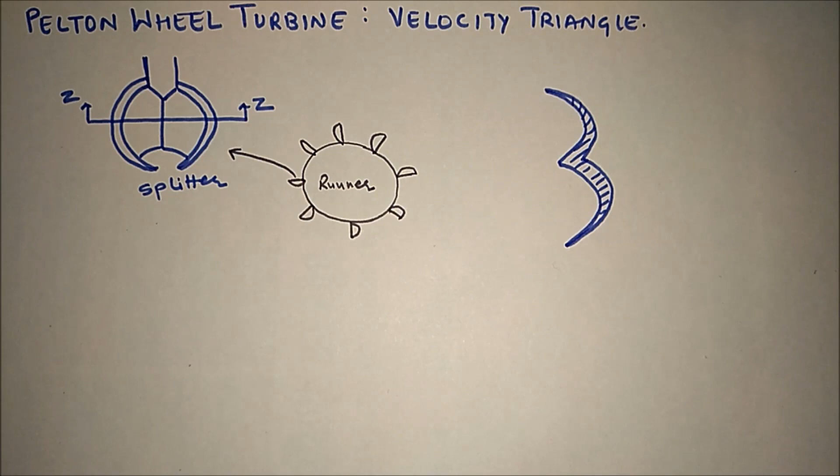This is the second part of Pelton wheel turbine. In our first part, we have discussed the construction and working of this turbine, and in this video we are going to discuss the velocity triangle for this Pelton wheel turbine.

So in our previous video, I have shown you the runner, the working and construction. In construction we have seen this is a runner, and in the periphery of the runner the buckets are attached, that is blades, or you can say vanes are attached. The vane is the shape of two hemispherical bowls like this. So when you see the blade it will look like this.

This is a splitter. What is the function of a splitter? The splitter divides the jet of water into two equal parts, to go here and here, both the buckets. Now when you cut a cross section here, you will see the bucket somewhat like this. In the previous part I have also told you that the jet of water hits the splitter.

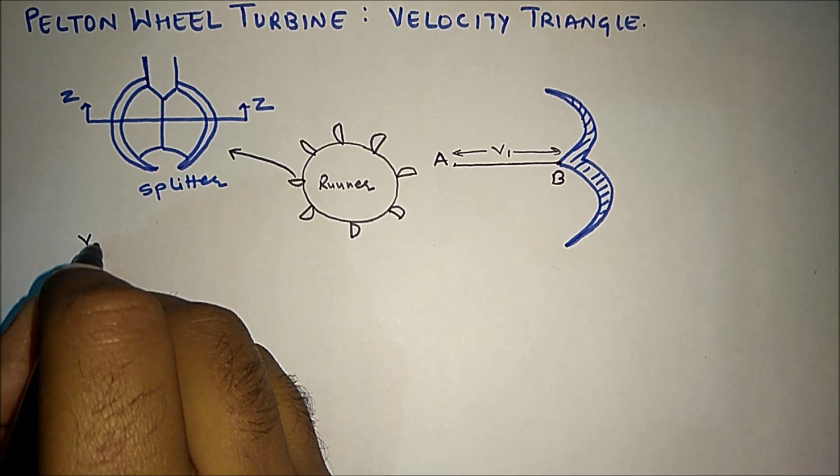Means water enters in the bucket like this. So let this be A, this be B. So this is the velocity, that is v1. Because we are drawing the inlet triangle, I have used v1. So what is this v1? This is the absolute velocity of jet. This is v1.

Now as the vane or blade is also moving with a velocity u1, this is velocity of blade, or you can say vane or bucket, whatever you say. So there is a velocity of blade also. Now both are moving in the same direction. Blade is also moving in this direction, jet of water is also moving in this direction.

So the relative velocity of both will be the difference, that is relative velocity vr1 will be equal to v1 minus u1, because v1 and u1 both are in the same direction. So let this point be C. This will be the relative velocity vr1.

Now we know that the absolute velocity has two components. One is horizontal and one is vertical. Horizontal component is vw, that is whirl velocity, and vertical component is flow velocity. If this is absolute velocity, it has two components, horizontal and vertical. So in this case, v1 is horizontal, so the vertical component will be 0. Means in this case, vf is 0. Means the value of v will be equal to vw1, because this is horizontal. So this will be equal to vw1.

And in this case, this angle is alpha, and alpha angle is 0. What is the angle alpha? Alpha is defined as the angle between absolute velocity and the direction of velocity of blade in the inlet triangle. So here vf and alpha are 0. So v1 will be equal to vw1. And what is vw1? Vw1 is whirl velocity at inlet.

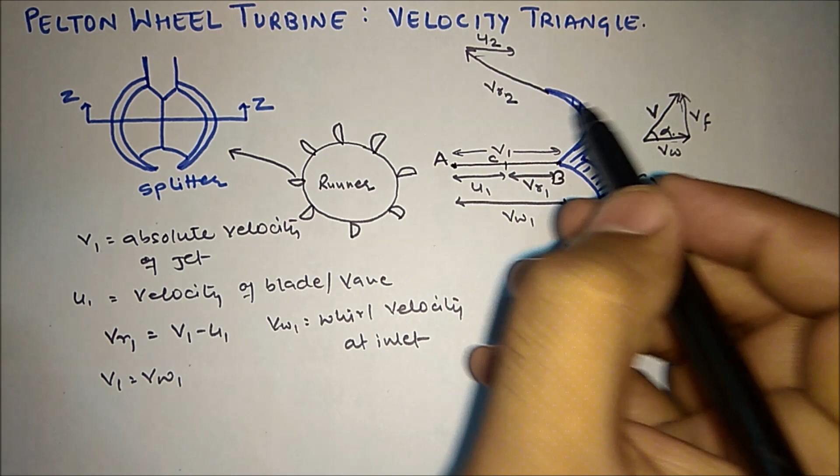So this is the inlet triangle, and when you see the outlet triangle, the water enters with vr1 velocity, so it will exit with vr2 velocity. And there is also a blade velocity of u2. In the outlet triangle I have used u2, and here we have used u1. When you join this line, this will be v2, the absolute velocity at outlet.

So absolute velocity of jet v1 and v2: v1 is for inlet and v2 is for outlet. Similarly u1 and u2, velocity of blade or vane for inlet and for outlet. Now here again v2 has two components. One is the vertical component, the other one is the horizontal component, that is vw2, and this will be vf2.

Now vf2, this is flow velocity at outlet, because at inlet it is 0. vf1 is 0. Now I hope you all know all the variables. Absolute velocity, velocity of blade, relative velocity, whirl velocity, and this is flow velocity. 2 is the subscript used for outlet and 1 is the subscript used for inlet.

Now we have to define 4 angles, that is alpha, beta, theta and phi. Now these are the angles for absolute velocity, and these are the angles for relative velocity.

Okay, alpha is for inlet, beta is for outlet, theta is for inlet, and phi is for outlet. Okay, so alpha and beta are the angles made by absolute velocity with u, that is the direction of blade, and theta and phi are the angles made by relative velocity with u. Okay, so phi is the angle of relative velocity with u for outlet.

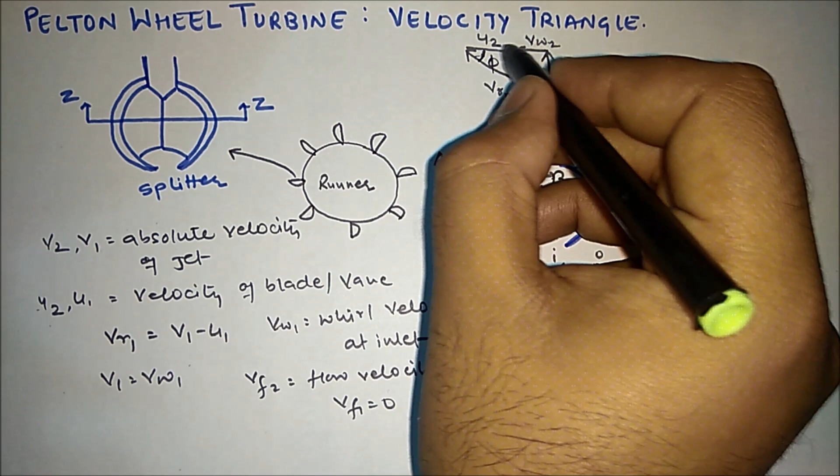So relative velocity is Vr2 and u is this, so this angle is what? Phi. And for absolute velocity with u, for outlet it is beta. So this is absolute velocity and u direction is this one, so this angle is beta. Okay, and for inlet both the angles are 0. That means for inlet triangle, alpha and theta both are equal to 0.

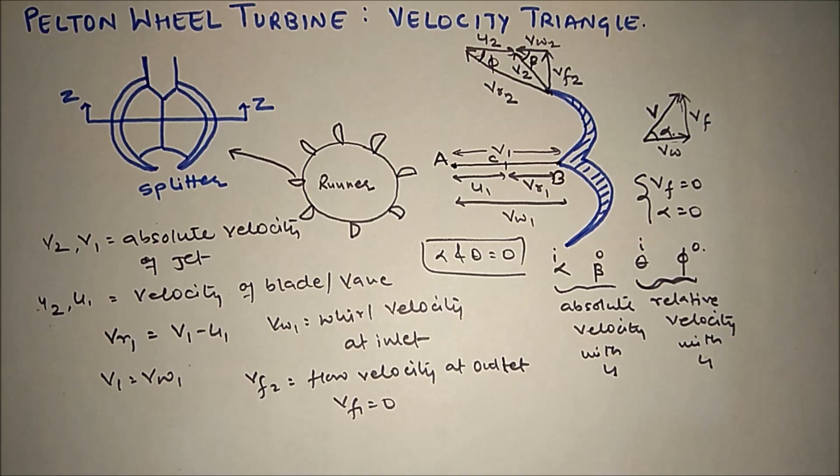Okay, this is a way how to remember, how to study this velocity triangle of Pelton wheel turbine. There is an easier way to study this. Let me explain that. So this is the velocity triangle of turbine.

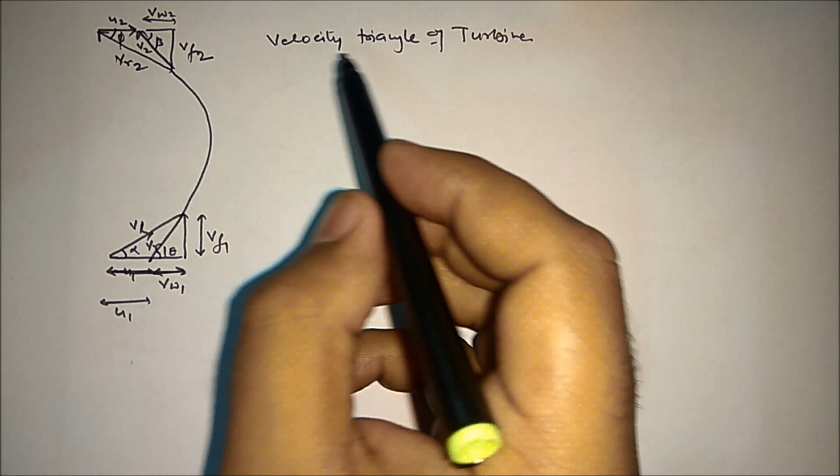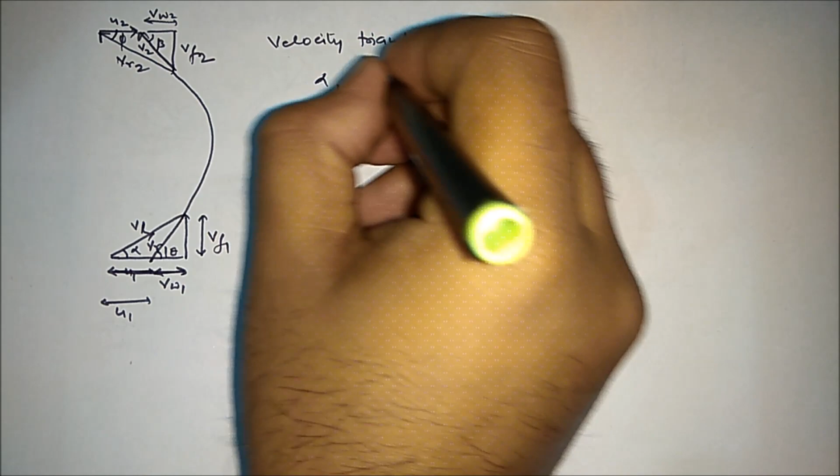So if you remember the velocity triangle of turbine, from this you can easily remember the velocity triangle of Pelton wheel turbine. You just have to put the value of alpha, theta, and Vf1 equal to 0. You get the velocity triangle for Pelton wheel turbine.

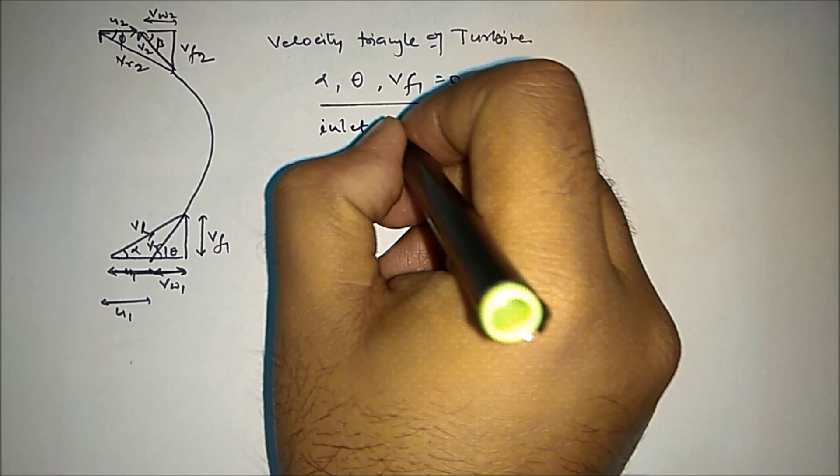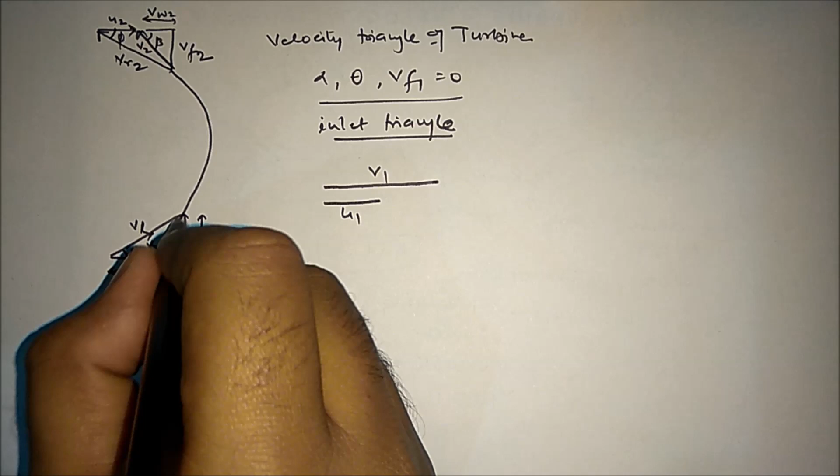So for the inlet triangle only, if you make alpha, theta and Vf1 0, then V1 will be a straight horizontal line. This is V1, and this is U1, and as theta is 0, Vr1 will also be horizontal, so this is Vr1, and this whole is Vw1. This will be the inlet triangle.

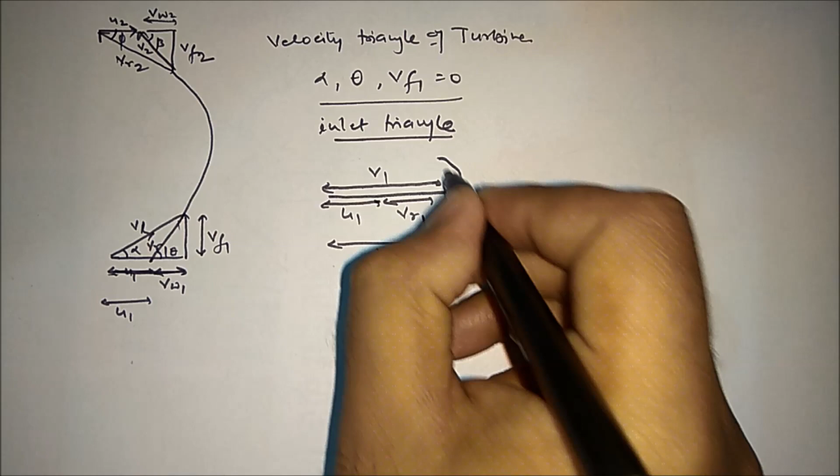This will be the inlet diagram for Pelton wheel turbine. Okay, and the outlet triangle is the same as this. So if you know this velocity triangle, you can easily remember the Pelton wheel turbine. I hope you got the concept of Pelton wheel turbine velocity triangle.

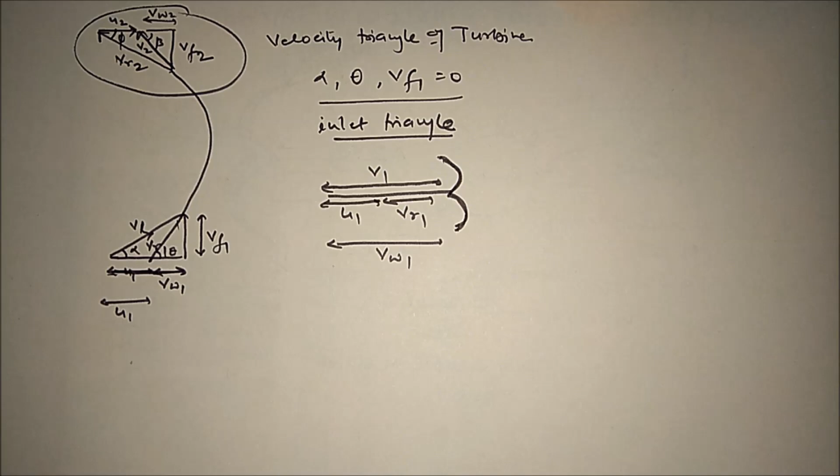Let us just have a quick review of this. This is the outlet triangle, this is the inlet triangle. Now it's not a triangle, but you can call it that, because this is a velocity triangle. So at inlet, the velocity of jet is V1, that directly hits the splitter. And the velocity of vane is U1. Relative velocity will be V1 minus U1, because V and U are in the same direction. So this is Vr1.

So Vr1 is equal to V1 minus U1, and the whole velocity will be Vw1, because V1 has only horizontal velocity and no vertical velocity. So vertical velocity Vf for inlet is 0, and alpha is also 0. That's why V is horizontal only. Now this will define the inlet triangle.

For the outlet triangle, if it enters with Vr1, it will exit with Vr2. If there are no losses, if smooth flow is there, then Vr1 will be equal to Vr2. So with Vr2 and U2, the direction of vane, the resultant will be V2, with its vertical component and horizontal component.

We have defined 4 angles, that is alpha, beta, theta and phi. Alpha and beta are the inlet and outlet angles that absolute velocity makes with u, and theta and phi are the angles that relative velocity makes with u. Okay, so I hope you got this figure.